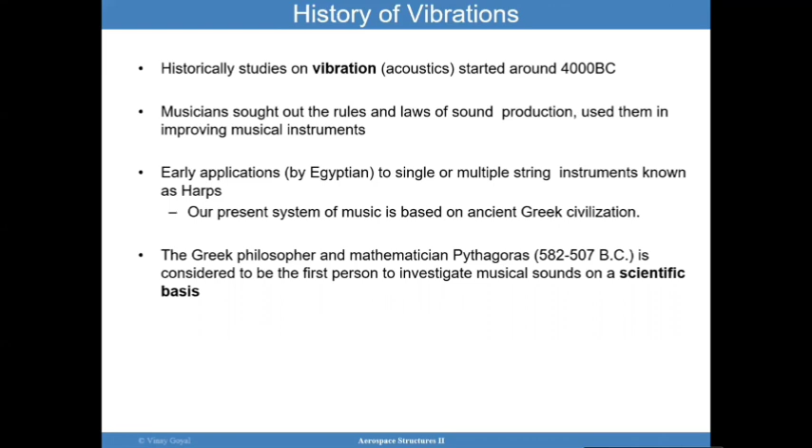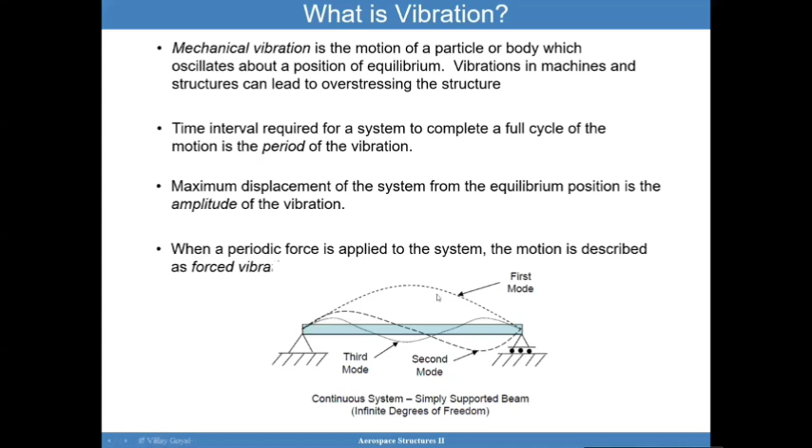We call that a forced vibration problem because it's no longer free. What I mean with free is I pluck it, I let it go, and the system starts vibrating in one of these shapes. That's a free vibration situation. In forced vibration, I continuously apply that load, forcing the system to react with that given force. Very important definitions to think about as we move forward.

Why dynamics? Why do we need to look at dynamics? Any structure or system undergoing dynamic loading will respond differently than a system undergoing static loading. If I apply a load very slowly, there's potential it will react statically. But if I apply a sudden load, it's more likely to respond dynamically. That's not always the case, and we'll talk about that later.

Dynamics also helps us quantify the dynamic characteristics of the structure, and it can allow us to predict the response of structures under a dynamic environment. Excessive vibration can also cause excessive deformation. Take as an example car noise, vibration coming from the engine, so you could have a situation with significant excessive deformation.

Turbo machinery, as an example, excessive vibration can cause structural failure due to high dynamic stresses. Examples include turbine blades and buildings under earthquake motion.

If you were to do the laundry and put all your clothing on one side instead of distributing it around a circle, and you run a spin cycle, you're going to see a tremendous amount of noise, and the machine will start vibrating. That's an example of what could happen if you have an imbalance.

Such imbalances can also occur in turbine blades or rotor dynamics. You could have a blade that's not of equal mass as the others, and this will cause excessive vibrations on that particular turbo machinery. So why dynamics? Because dynamics can drive failure, and we need to really understand it.

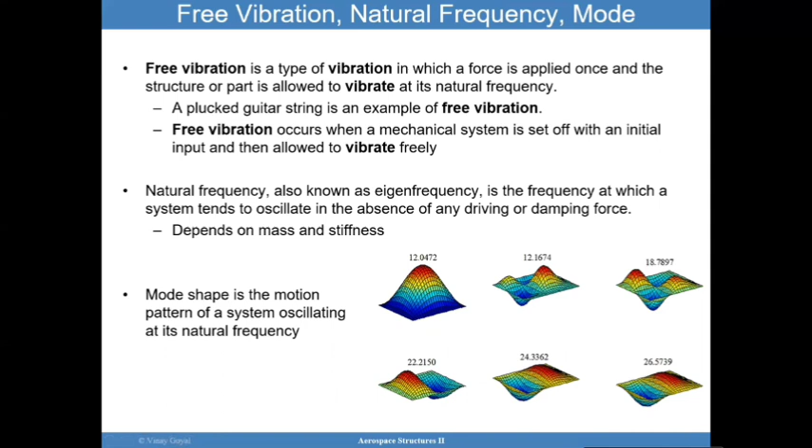These frequencies are in hertz, corresponding to the number of cycles vibrating per second. So it's clear that this is an important consideration for whether you should consider a structure static, quasi-static, or dynamic.

Natural frequencies close to the driving frequencies can cause excitation. If I have a natural frequency of a plate at 20 hertz, say, and apply a loading close to 20 hertz, back and forth at that same frequency, I'm going to cause something called a resonance condition, and that resonance condition can cause failure. So it's important to understand that if operating frequencies are close to the natural frequencies, it could cause failure.

But if I'm operating way outside of the natural frequencies, it's possible to treat the system as quasi-static or static, which means the load is applied slowly.

There are other types of analyses that should be considered: harmonic loading, which we'll be talking about, random vibration, also to be discussed, as well as acoustics, shock, and vibration responses.

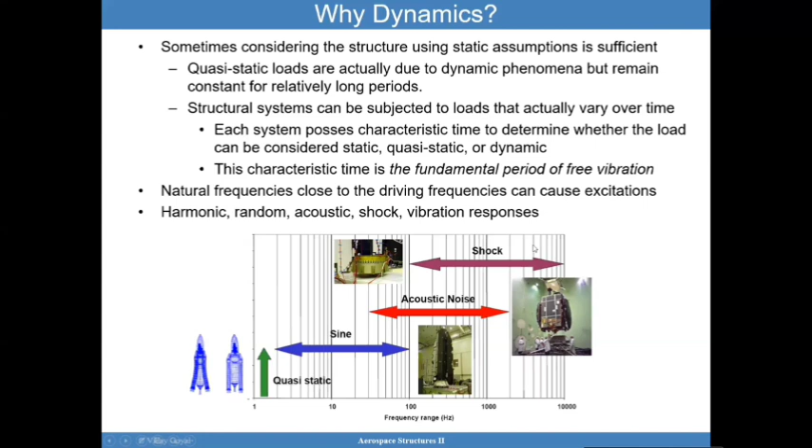What are the different types of dynamic analyses that could be conducted? You have the real eigenvalue analysis. This is basically a free vibrations problem, meaning I have that plate that I showed you earlier, and that plate is plucked. So what are those natural frequencies and mode shapes that plate is going to take?

You also have the linear frequency response analyses, where there's a steady state response associated with loads that vary as a function of frequency. We also have the linear transient response analysis via direct time integration, so you're looking at the response of linear structures to loads that vary as a function of time.

You have the modal dynamic transient analysis, where you look at the response of linear structures to loads that vary also as a function of time. You may use this approach to look at jitter analysis, base drive analysis, and coupled loads analysis, things that we'll be talking about later on.

You also have a shock response analysis that can be performed, and then you have the vibroacoustic or random vibration analysis that can be conducted.

So today's course, we're going to be discussing the real eigenvalue analysis, the transient response analysis via direct time integration, and I'm going to jump into modal transient dynamic analysis. Then we'll also be covering steady state response due to an input that is of a harmonic nature. I'll be discussing what harmonic really means.

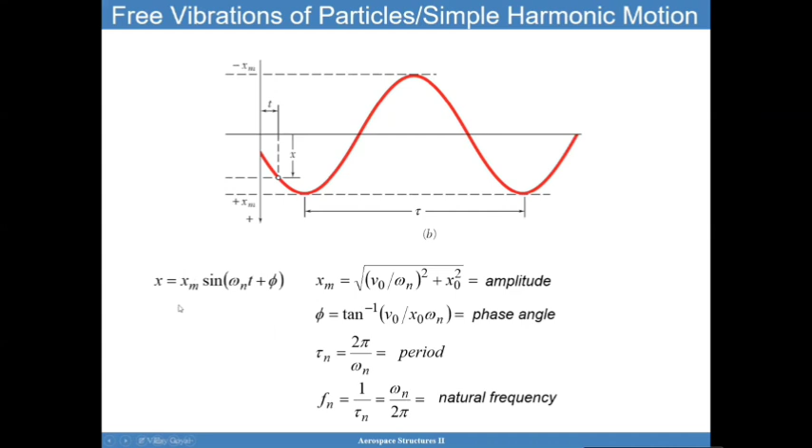So once you know the position x, you can calculate the velocity as x dot, because velocity is equal to the derivative of the position with respect to time. And you can also calculate the acceleration, which is the second derivative of x with respect to time. This is exactly how you find the velocity and acceleration.

So let's cover a little bit about forced vibrations. Okay, let's discuss that now.

In the previous example, we didn't have any forcing input that was dynamic. We only had a weight applied, coming from the box itself, and it was getting balanced by the tension in the spring. But we did not apply a force that was vibrating.

In this case, what I want to do is apply a harmonic force, a periodic force. What I mean by applying a force is that the force is oscillatory. Think of it as you pushing and pulling continuously, following a sine function. Omega f is the frequency at which I'm applying that force back and forth, okay?

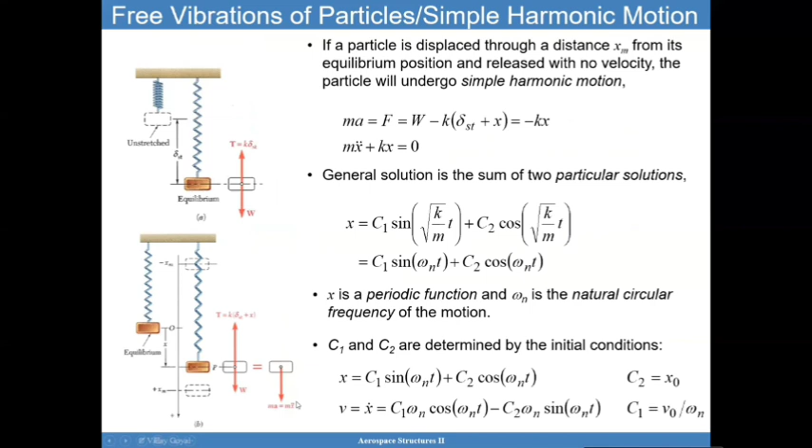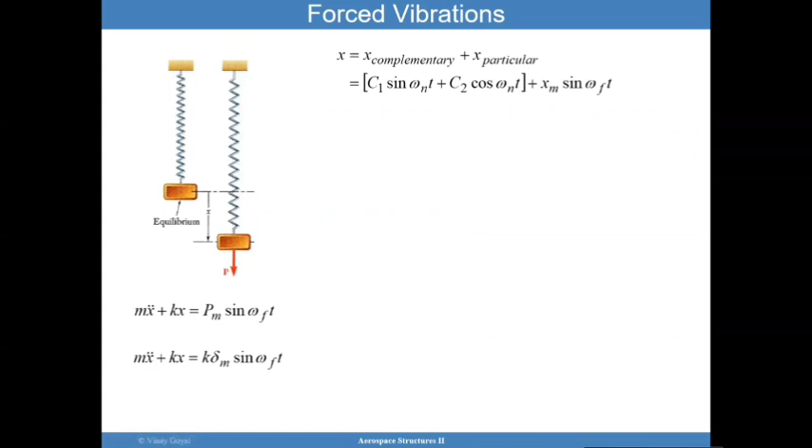So how do we solve this equation here? It's a very simple way of approaching this. First, you have to consider the complementary solution plus the particular solution. The complementary solution is fairly simple, it's the solution we discussed before. Then you have the particular solution with xm, which can be found by substituting this expression back into the differential equation. Again, I don't want to use this course to teach you how to solve this, as you have taken a differential equations class.

But we can take the particular solution and substitute this into the governing equation, and when you do that, you can basically solve for xm. Once you solve for xm, you'll realize that K and M are known, because that's the stiffness and the mass of the box, and omega F is the frequency you're applying. So this right-hand side is fully known, so you can find xm from this equation. Then C1 and C2 again fall from the initial conditions we talked about before.

Notice how when omega F is close to omega N, this bottom denominator goes to 0, and so the amplitude, or xm, from the particular solution side, goes to infinity. Clearly, when omega f equals omega n, you have a resonant condition, meaning that the forcing frequency being near the natural frequency of the system causes a significant amount of motion, or amplitude, in this example. You can see here that we take the peak amplitude of the motion, and it goes to infinity. So we have resonant conditions at that point, and we call that resonance of the system.

But the good news is that in a lot of situations, the vibrations are tempered by the fact that we do have natural damping. You can have dry friction, for example, or a situation of fluid friction or internal friction. I guarantee if you take a little spring with a mass and you yank it and let it go, it'll start vibrating, but it's going to die out. Why is it dying out? It could be heat dissipation, the spring itself has damping within the material, or it could be the air surrounding it with drag causing it to slow down. So there are a lot of different ways this could happen.

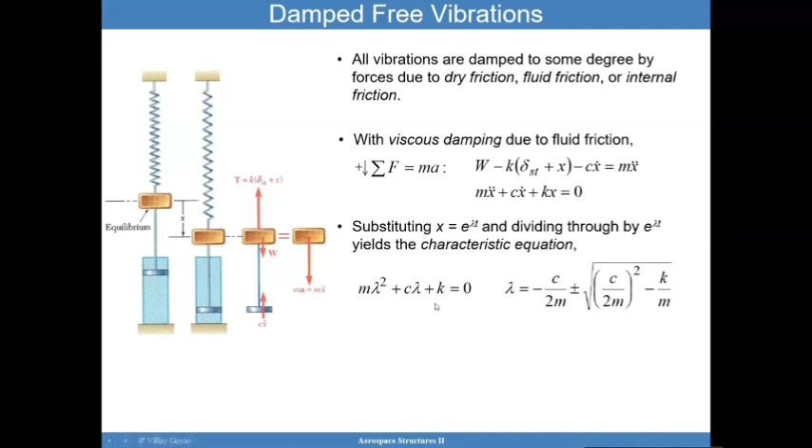You can use differential equation solutions to solve it. wolframalpha.com also works—if we substitute e to the lambda t into this equation, we can find the solutions for this problem. I'll just jump to the punchline: these are the solutions you can find.

You have the situation where if I define c sub c as twice m times omega n, and call this the critical damping coefficient—this mass, this natural frequency multiplied together—if this coefficient c is greater than the critical damping coefficient, then you're going to have heavy damping.

So the motion will have very little oscillatory behavior, almost non-vibratory—I invite you to think about how that could happen. If I have critical damping so that C equals C sub C, then you get non-vibratory motion again, so you don't have this box moving back and forth. All it's going to do is die out. Most likely it will follow something like this dash line and die out.

The light damping situation is where this coefficient C is less than the critical damping coefficient. In that case, you get vibratory motion, and it's going to die out eventually. I wanted to point out that in a lot of situations, the motion may die out after this initial velocity or initial force you apply. Eventually, the motion will die out.

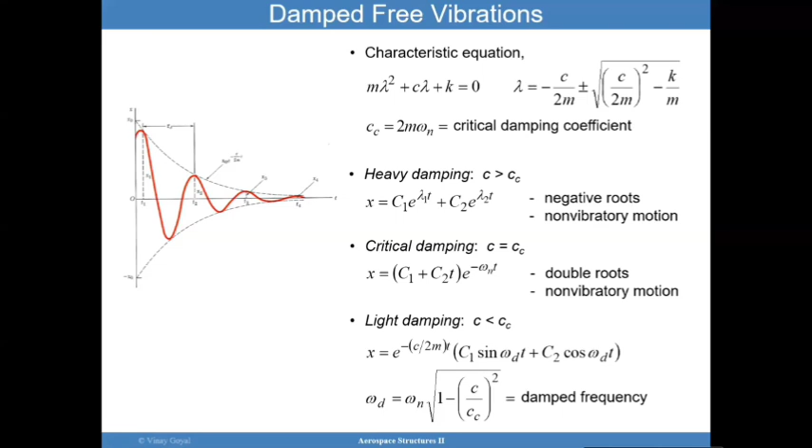Another situation is a forced damped vibration situation, where I have the same equation as before—not applying any external force, just getting it going back and forth. But if I add an external force now that is of a harmonic nature, we could consider that as F naught cosine omega t. F naught is the amplitude of the forcing function I'm applying. Omega is the frequency of the forcing function I'm applying.

The solution is made up of a homogeneous portion plus a particular solution. The homogeneous part of the equation is this one here, and the particular solution to this equation is this one on the right, where x and phi need to be found. That can be found simply by substituting this into the top equation.

What I want you to notice is that as time grows, as t becomes large, e to the minus whatever is here becomes closer and closer to zero, so these terms will disappear, and you get a steady state motion driven mostly by this term right here. So an input that's of harmonic nature as a forced vibration input is going to cause, if you have a damped vibration situation, an initial transient part of the solution, plus a part that will not die out, and that's harmonic—this is the steady state portion.

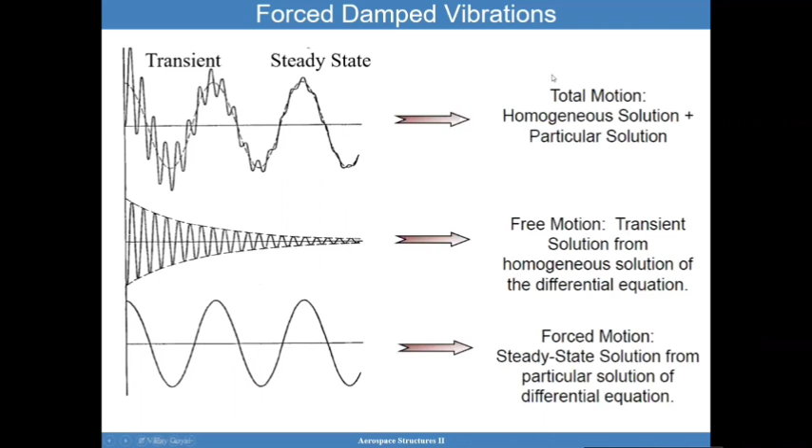Another interesting aspect of this problem is to really understand how much amplification I'm really getting with respect to the static solution. As you know, I could apply load P on this box statically, and that's going to cause an amount of stretch and an amount of motion.

But if I'm interested in understanding how this harmonic motion amplifies how much this box really moves, we can determine that, because X here is equal to this, and I can try to determine the amplification by dividing X by how much deflection I would really have gotten if I apply that force statically.

So if I apply that force statically, this is X naught, and I can determine if I were to apply the motion—the force, but now in a harmonic way—what is the amplitude of how much more it amplified.

The second observation is, assume for a second that we didn't have this coefficient C. That returns to a situation where you have no damping.

So you recover back the situation where if omega is close to omega n—the forcing frequency is close to the natural frequency of the system—then you have an infinite amount of magnification. But we know for a fact we usually have some amount of damping, so it will not be infinite, and this is where this term comes into play.

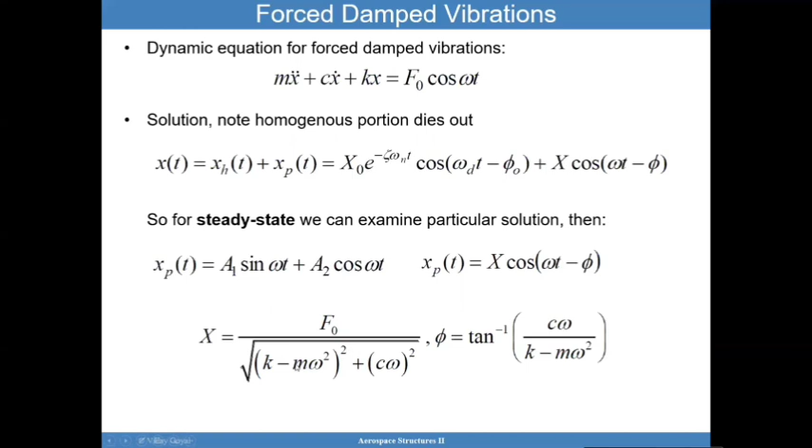Now, I'm not trying to add more variables and confuse you, so pause the video and see that what I've done is nothing more than manipulating this equation. I divided the bottom by omega n squared, since omega n squared equals k over m, and used this to rearrange the equation, relating it to what happens if I apply that load statically.

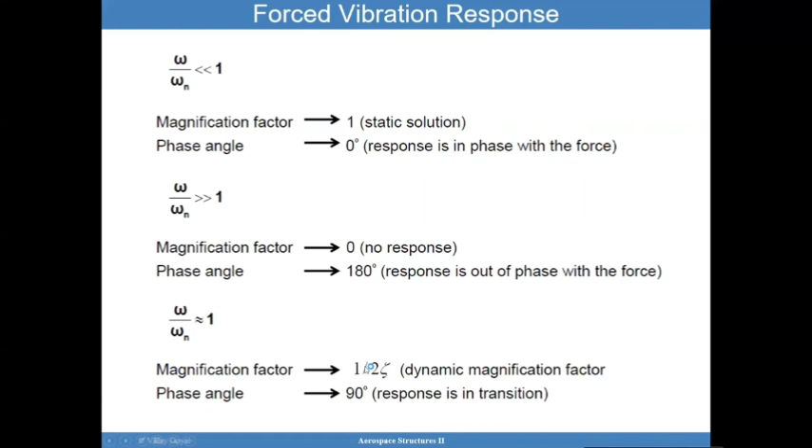Very important: if omega is much greater than omega n, you almost have no response in the system, and the phase angle will be such that the response is out of phase with the force. If omega is close to omega n, which is the resonance condition, the magnification factor is given by 1 divided by 2 times this symbol, which is the ratio of C, the damping coefficient, divided by the critical damping, defined earlier in the charts.

So how do you deal with a situation where you have a general periodic force? It could be a force that varies as a function of time but repeats itself. I don't want to go into heavy math, but I want to bring this to your attention in case you encounter it. The type of force I showed you was a simple harmonic sine function, but you could have a very general periodic force.

The Fourier series states that a periodic function can be represented as a series of sines and cosines. You can take any periodic function and express it this way, written in summation symbol, where AJ and BJ can be found through these formulas. This is how you express a general periodic function using Fourier series.

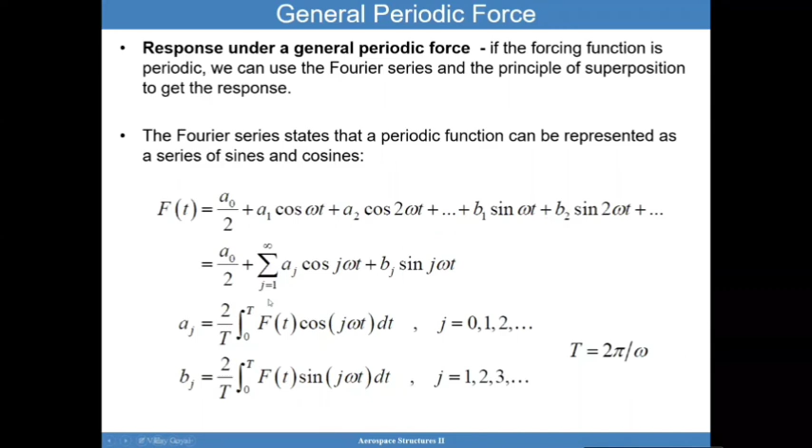So let's jump into finite elements, because I think that's where we can really take the idea of dynamics and really see it being applied at full-blown proportions. So that's where we want to jump into now.

What is the goal is that if you have a structure that's subject to loading environments, and it could be static, it could be dynamic, I want to be able to tell you where the structure could fail. That's one potential use of this. Another potential use of this is clearances. I want to keep a particular clearance.

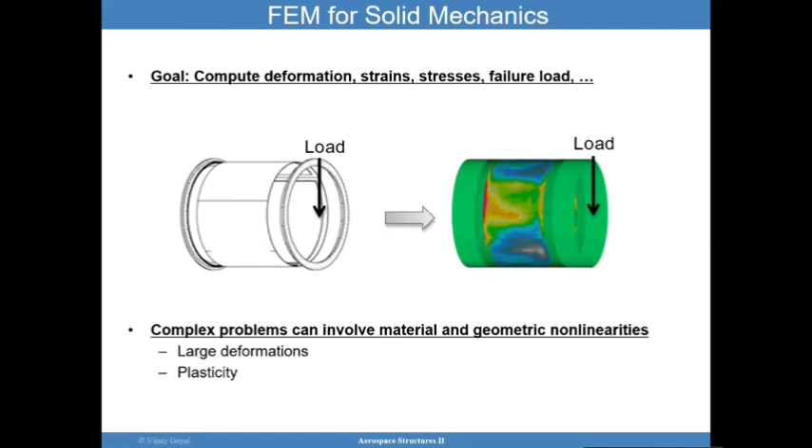So to solve this kind of problem, I cannot just simply use these simple formulas because the systems are a lot more complex. And so what are the driving equations that tell us about the motion of these systems?

So you have the equilibrium equations of elasticity, which were previously discussed. And this one comes from the second Newton's law, the integral form of second Newton's law. This is basically summation of forces equals ma. Think about it. This acceleration right here is the deflection, and these are body forces. And so stresses, you're taking the derivative of stresses with respect to the position, plus the body forces equals the accelerations. And these are the deflections.

So you have three equations here. I takes values 1, 2, and 3. And you have 6 stresses that are not known. So 3 equations, 6 unknowns.

You have the constitutive law, which relates stress to strain. And I'm using the most general way of describing stress to strain, which is an anisotropic material. Okay, so you're used to stress equals modulus times strain. I'm just trying to point out that the 6 components of stress are related to the 6 components of strain. And this constitutive law can be found through testing. So C is fully known. And in a simple situation, it's just the modulus of elasticity.

So there you have 6 equations because I have 6 components of stress. So I should have 6 equations here. And I have 6 strains are unknown. These are the 6 strains that are unknown.

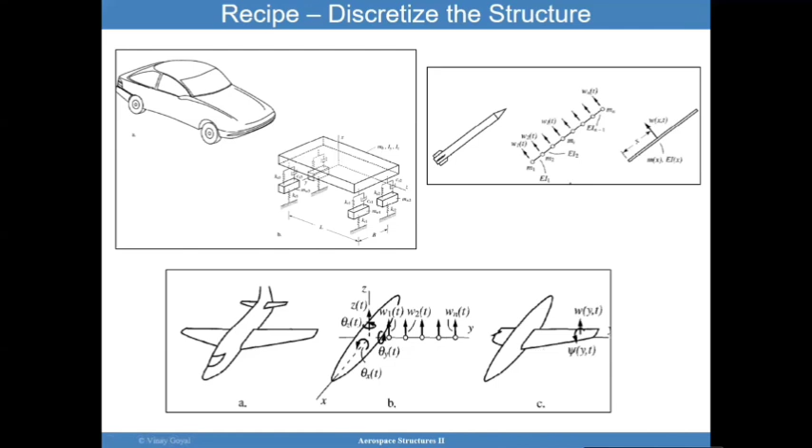So how do I solve these equations, which are highly complex and highly coupled? As you can see here, one way to solve these equations is to plug epsilon ij into this equation. And so everything here now is in terms of deflections. Then you can plug this equation back into the first set of equations. And now you have a mega gigantic 3 equations that are functions of deflections, which you can then solve. And once you know deflections, you can solve for strains. Once you know strains, you can find stress.

And if you can find stress and you know the strength of the material, you can determine whether the structure will fail or not. So the idea in finite elements is to formulate a systematic solution procedure for solving these partial differential equations over simple subdomains.

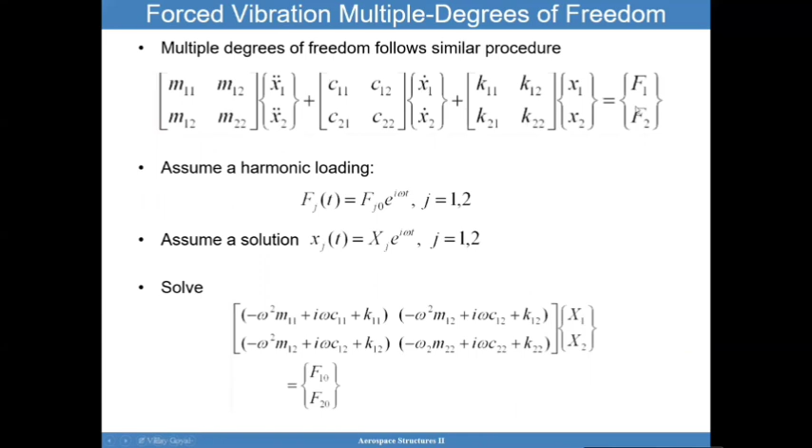And here I have damping, and we can add that too, but the bottom line is this is a mathematical miracle, because I took 15 equations that are highly coupled and turned them into a matrix of mass, stiffness, and a vector of deflections and a vector of accelerations equals a vector of external forces applied. So this is huge progress that we made here.

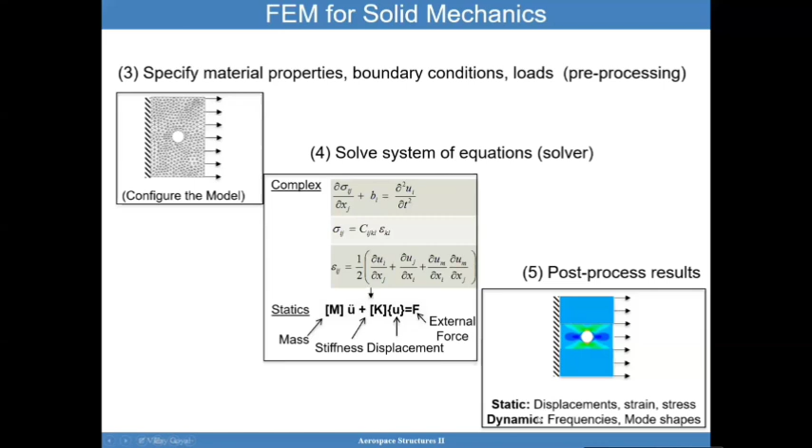Then I can now solve this equation. I'll show you how this is done. Once you solve these equations, you can post-process the results. If I want a static solution, you turn the acceleration term to zero and get the static solution. If I want to solve this dynamically, I can do that too.

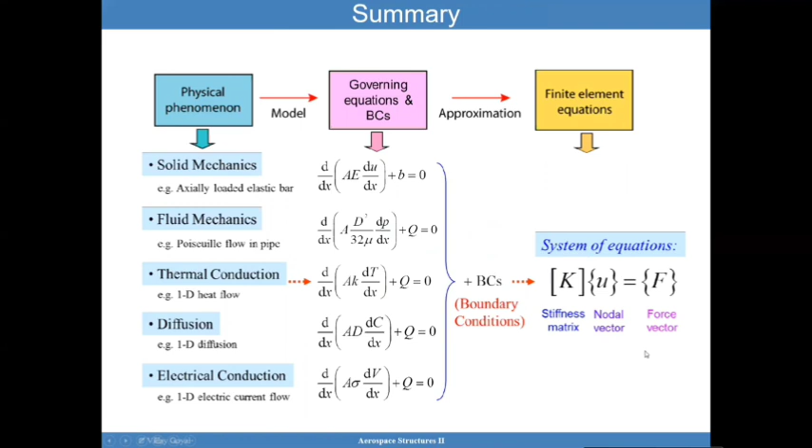You can get a system of equations that looks like here on the right-hand side. Here's an interesting example of a temperature heat transfer problem. I know we're not discussing heat transfer in this particular lecture, and it was discussed earlier, but I want to discuss it in terms of what finite elements is really doing for you.

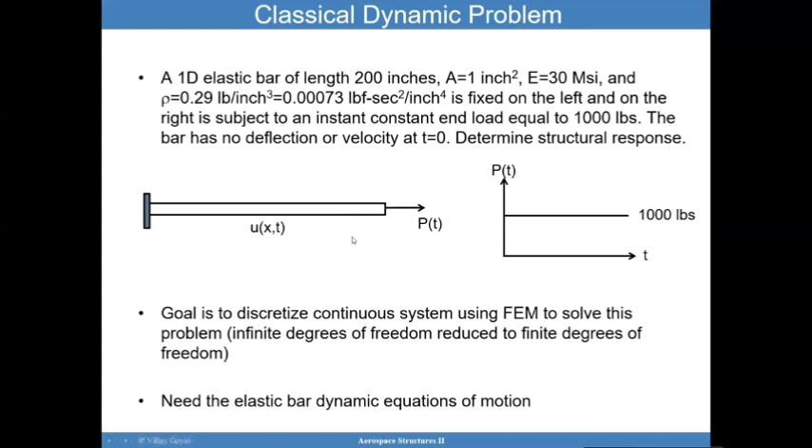So what is the first step? I don't want you to get hung up on the mathematics, but I'm trying to show you that I can take any equation and turn it into discretized form. I will show you the fundamentals of how that's done. That does not mean that this particular lecture is meant to teach you how to do that.

For that, I have other lectures in my YouTube channel that go into that in more detail.

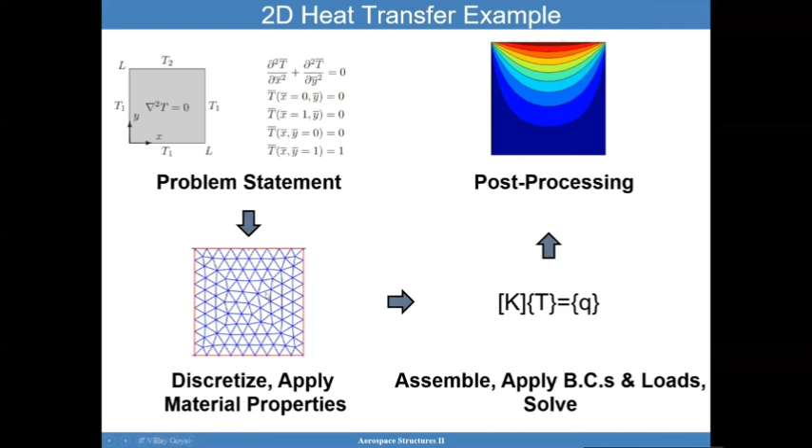So now this is a continuous system, but I want to discretize it into two elements, two domains, two subdomains. Let me remind you what we did: we have a continuous system, we discretize it into a finite number of domains—which is the reason it's called finite elements—because I've taken a continuous domain and turned it into a finite number of subdomains, and each of these subdomains is called an element.

In this case, I've taken a continuous system and turned it into two elements. So I've simplified and discretized the domain into two elements, and I want to approximate the deflection u, the axial deflection across this bar, with a linear approximation across each of these elements.

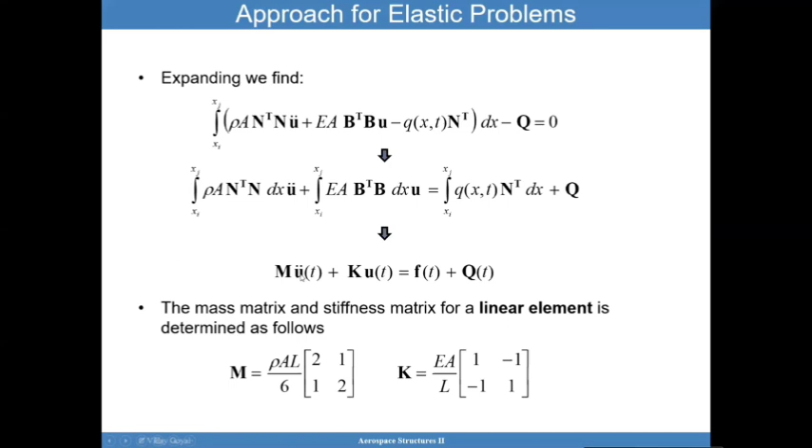That makes sense. I have it for a single element. And the beauty of this, and the point I'm trying to make over and over, is that I have taken a fairly complex differential equation, where u, the deflection, varies spatially but also varies in the time domain. I've shown you how this was turned, for a single element, into a simplified linear algebra type problem.

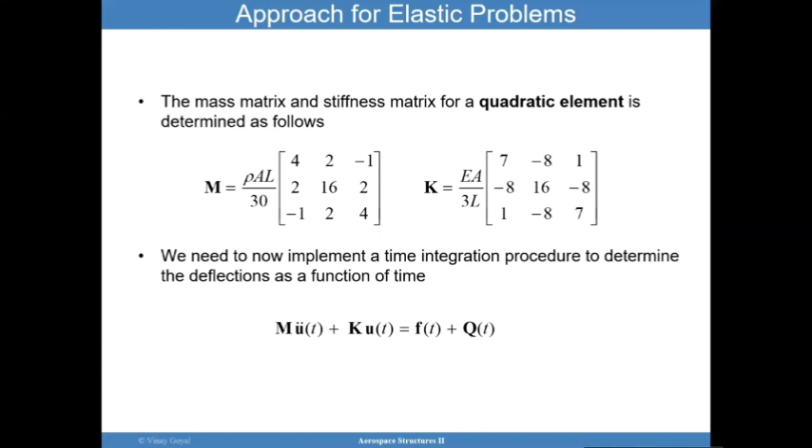For a quadratic element, if I were to use a more advanced element where I approximate the deflections across the element using a quadratic approximation, then you will have a 3 by 3. It will be more accurate. But the bottom line is we need to figure out a way of solving these equations.

So let's go back to this classic dynamic problem. I've shown you how I was able to turn a differential equation into a simplified problem where it looks like a linear algebra problem. So here is a bar with the load applied as a function of time.

And I've discretized the domain into two elements, so I have a total of 3 degrees of freedom. This one right here is known because it's always fixed. So for element number 1, I have this as a mass matrix and this as a stiffness matrix. For element number 2, I have this as a mass matrix and this as a stiffness matrix.

What I want to point out here is that we took a continuous system where U varies across the whole thing, and I've turned that into a discrete system where it only depends on the unknowns at nodes 1, 2, 3. So I have simplified the system quite a bit with 2 elements and 3 nodes, 3 degrees of freedom. This is the important thing I really want you to understand.

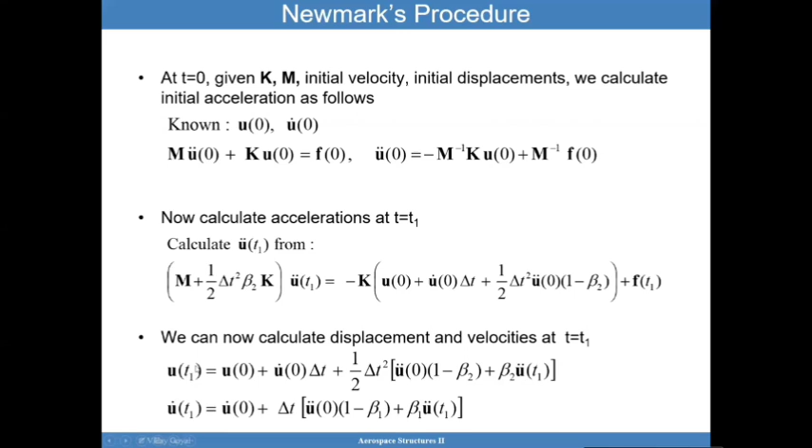Based on this information, I know the velocities at time equals 0, the accelerations at time equals 0, and the accelerations at time equals t1 because I calculated it from here. Beta 1 is a parameter from Newmark's method, and this allows me to calculate u dot at time equals t1. So now I know the deflections and velocities at time equals t1 — good news, I was able to march the solution forward.

So what happens if you want to time step a little further, to time equals t2? Again, we can calculate the acceleration. I'll look at time equals t2. Delta t here is t2 minus t1, so I went from t1 to t2 — your delta t is your time step here, which is t2 minus t1. So this is fully known.

M bold is known, K bold is known, beta 2 is a Newmark method parameter, so all this is known. All this stuff was calculated already — I found the deflections, velocities, and accelerations, and I know the force moving forward at time equals t2, because that's what I'm applying. So all this is known; we found it from the previous time step. From all this information, I can invert this to get u double dot at time equals t2.

Once I know this acceleration at time equals t2, I'm ready to find the velocity as well. I know the velocity previously at time equals t1, and the acceleration at time equals t1. Now I know the acceleration at time equals t2 because I solved it here, and that allows me to find the velocities at time equals t2, the present.

We can now calculate the deflections too. I know the deflections at time equals t1, the velocities at time equals t1, and the time step, which is t2 minus t1. I know the accelerations calculated in the previous time step, and the accelerations from this time step. So I know all this information, and now I know the deflections and velocities at time equals t2. Now we continue to repeat the process and march the solution forward.

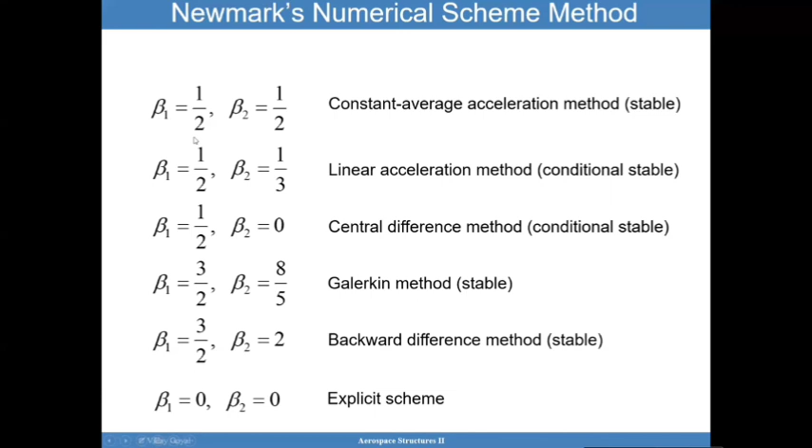In other words, if you keep your time step small, you're pretty much going to converge the solution. You're going to have unconditional stability if beta 2 is greater than beta 1 and beta 1 is greater than 1/2. I won't go into the mathematical theory of this because that's not really what I want to accomplish today. I have a YouTube video that goes into a lot of detail on this.

Going back to the problem at hand, I took a little break because my point was to show you a few things here. Let me step back. I had this highly complex elastic bar partial differential equation where the deflection varies spatially and over time. My goal here is to solve that in a simple, systematic way, because finite elements gives you a systematic way of doing it.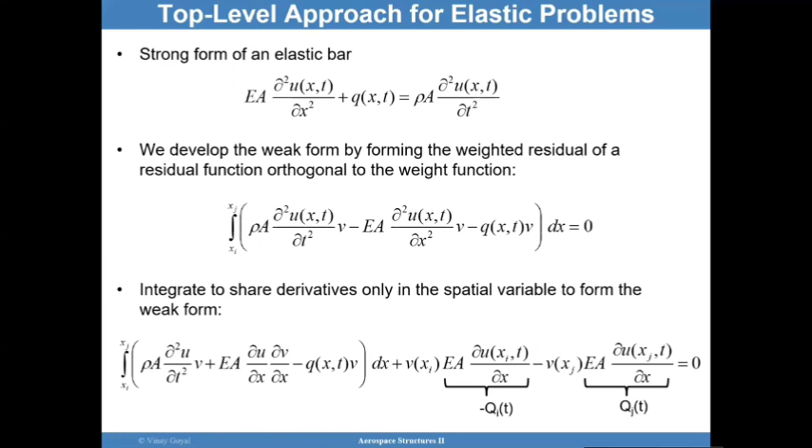What we've done is discretized the deflection, which is a continuous variable, into discrete elements. We discretized this domain into 2 discrete elements, and as a consequence, I've discretized the deflections into 3 nodes. In between, I have an interpolation or approximation function of that deflection. What I've really done is discretize that partial differential equation and turned the problem into a linear algebra problem. What I was trying to show you here is how to solve such an equation numerically.

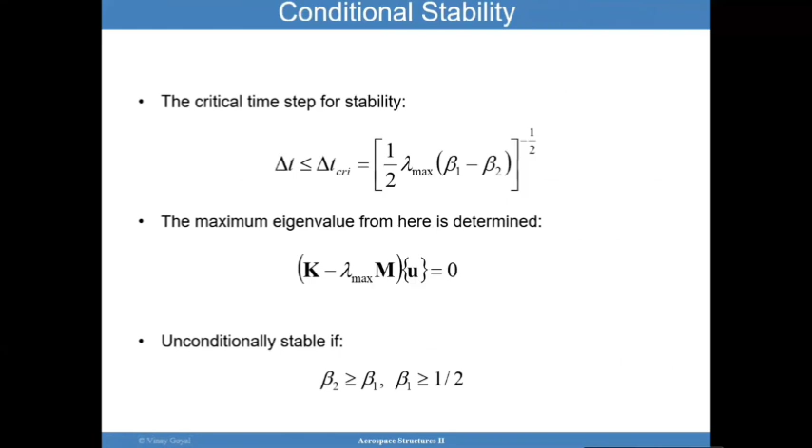And that's what I just did. We're going to demonstrate it now for the elastic bar problem we talked about. So I'm going to go ahead and march the solution for this. But before I do that, I want to impose the boundary conditions.

We know the deflection at u1 is 0 because it's fixed on that end. So since the deflection is 0, the acceleration is also 0. As a consequence, you can then eliminate the first equation—it's not doing much for me because I already know the deflection there. So we can just focus on the bottom two equations.

So I get this equation now, and these are the only two unknowns. We've basically eliminated the first equation because the deflection is known—I don't need it. In fact, I can see here that it doesn't matter; I can look at the second and third equation. Many people get confused about what you're looking at here, but these are three equations. That's what matrix notation is.

If you multiply this row times this column, you get 4 times u2 double dot plus 1 times u3 double dot, and so forth—that's your second equation. You can see here this 1 times 0 is doing nothing, so I can just focus on the last two equations. It eliminates the first column altogether, so I just have this square here that matters with these two vectors. That's what I got.

Now note that I don't have any force—no force has been applied to U2. Let me take you back to the original problem, and sorry for going back and forth. U1 is 0, no force is applied at this node, but we are applying a load at U3, which is an instant force of 1,000 pounds. That's why you see, corresponding to U3, this force applied.

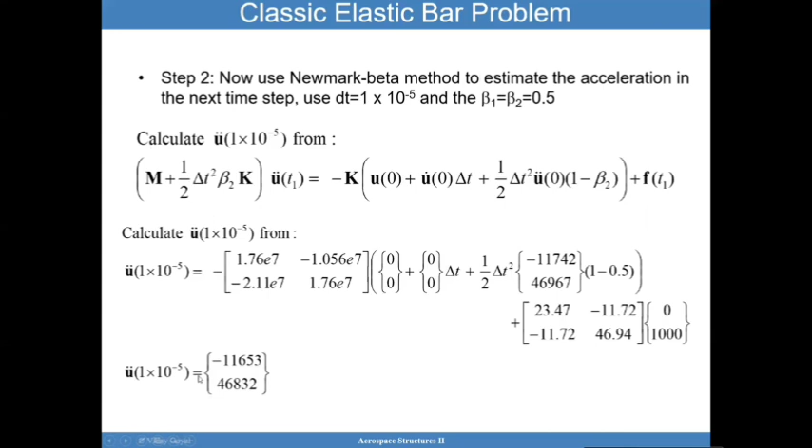Now that I know the accelerations at the previous time step and at time equals 0, I can plug it in here with beta 2 and beta 1 as 1/2. So I know delta t, I know u dot, I know u, and then I can get the deflections at time equals 1 times 10 to the minus 5.

So all this is known. The velocity is also known because I know the velocity at time equals 0, the acceleration at time equals 0, and the acceleration at time equals t1. Once I have all this information, I'm able to calculate everything I needed for time equals 1 times 10 to the minus 5. You can see a lot of computations that need to be done, and this mass matrix calculation has to be inverted — you have to invert this too.

Using this new information, we can calculate accelerations in the very next time step, 2 times 10 to the minus 5. Again, plug in the stuff from the previous time steps, and the force moving forward, so the present now is 2 times 10 to the minus 5. I know that's what that is. Now I can solve for the accelerations by inverting not the mass matrix, but this formula here, which will turn into the mass matrix if beta 2 is 0.

So doing that, I'm able to find accelerations. Once I know the accelerations, I can again find the deflections and velocities at this particular time step, so now repeat the process and keep marching the solution.

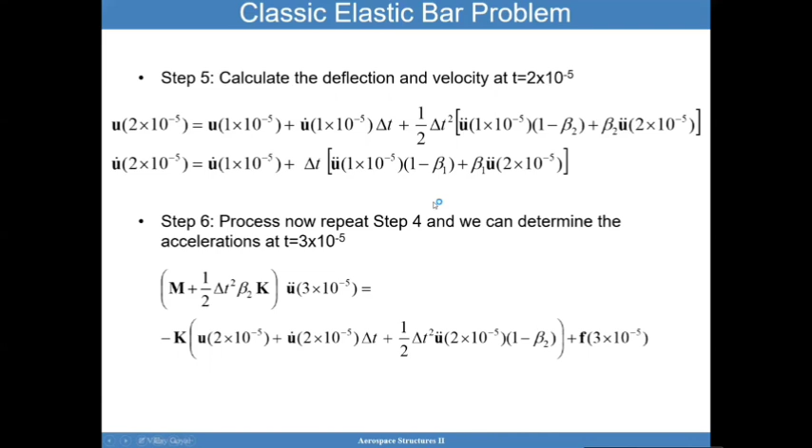This was done in Mathematica. My purpose today is not to teach you Mathematica, but why don't you go ahead and pause the video and see how I went about it. In fact, go ahead and see if you can even program it in a different program like MATLAB and time march the solution. I have a do loop here that basically runs through the Newmark beta method and solves for the deflections, accelerations, and velocities as a function of time.

And here you're going to see that I use all the same parameters in the example problem. I can then plot everything. In this case, the end deflection is what I'm plotting here.

And you can see the solution is periodic. You can see here that this one is repeating, these characteristics are repeating, this is repeating here, and this part is repeating here. So clearly it's a periodic response due to this instant force that's applied and kept constant. And there's no damping, so it's going to continue oscillating forever. Notice that if you apply damping, it's going to die out, potentially.

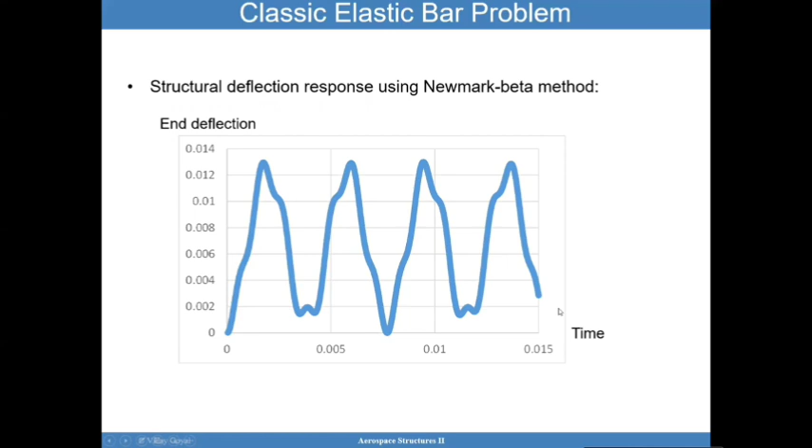How to implement this into Abaqus if you were to do it by hand?

This is not a finite element class, but it's worth explaining the brain behind the process. Here's how you define the nodes, here's where you define the elements, and here's where you apply the material properties. In this case, we have a truss element, and this is the element that was selected.

We have two elements labeled 1 and 2, which have nodes that connect. Element number 1 connects nodes 1 and 2. Element number 2 connects nodes 2 and 3. The coordinates of nodes 1, 2, and 3 are given here, along with the modulus, the Poisson ratio, and the density.

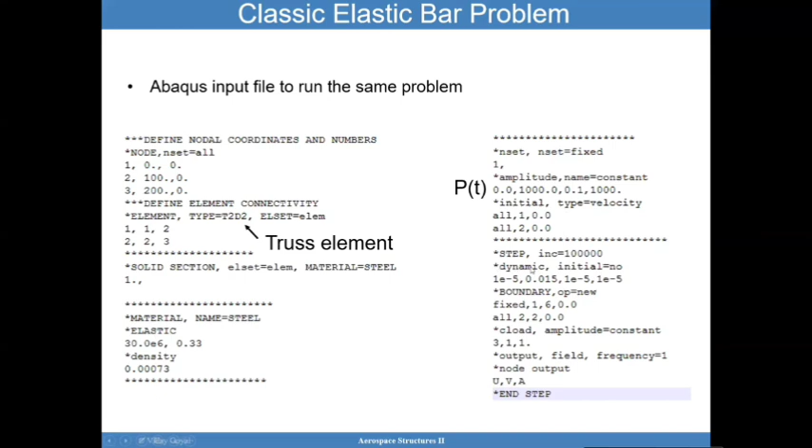I want to explain why that is, but first I want to point out that Abaqus uses the Hilbert-Hughes-Taylor method, HHT, for numerical integration. The Newmark beta method is a special case of HHT. HHT is a method that improves the numerical dissipation for high frequencies without degrading the accuracy of the solution, so you can time march without losing much accuracy. That's why HHT can be very useful.

The main difference with the Newmark beta method is this: Newmark is a special case of HHT obtained by setting alpha equals 0. So if everything I've done uses the Newmark method, setting alpha equals 0 in HHT recovers Newmark. But the reason it was not matching is not because I didn't use the Hilbert-Hughes method — it actually has to do with something called mass lumping.

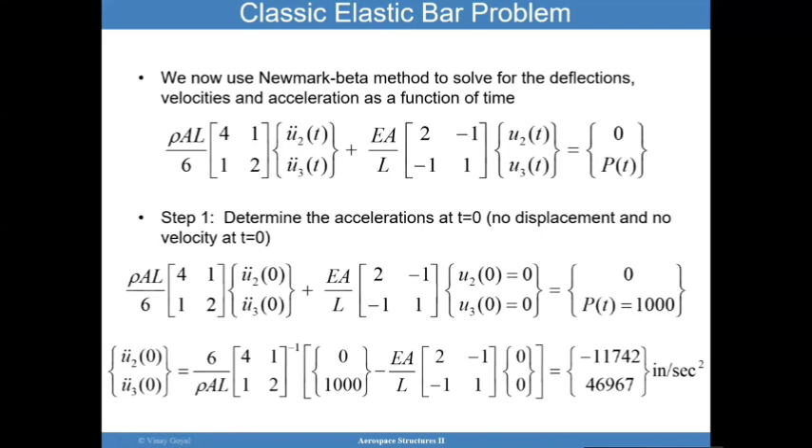Abaqus, to make everything more computationally efficient, looked at lumping the masses. Let me explain what that is. If I look at the mass matrix, it took the off-diagonal terms and put them all into the diagonal: 2 plus 1 is 3, 1 plus 4 plus 1 is 6, you put it in the diagonal, and 1 plus 2 is 3, you put it in the diagonal.

So the mass matrix was actually diagonalized, which improves efficiency in the calculations in some ways, but it reduces the accuracy a little bit.

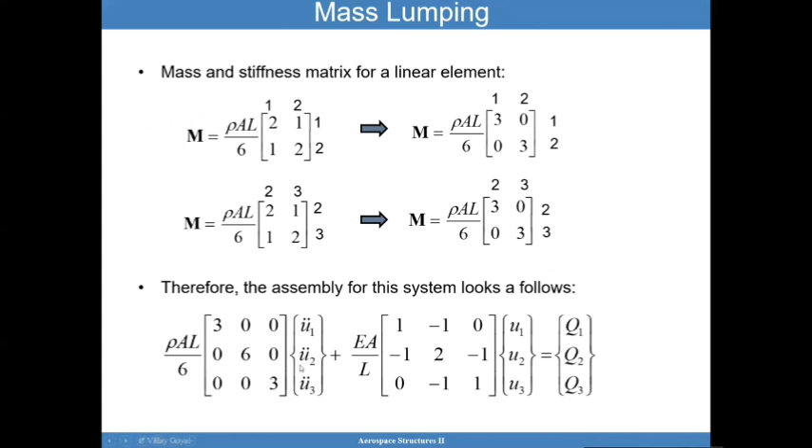So the new system, if we do what Abaqus did and lump the masses into the diagonals, lets us solve for the nodal deflections using the Newmark beta procedure. If I do that, you'll see that even though I used the Newmark beta method as opposed to HHT, I was able to match the solution in Abaqus.

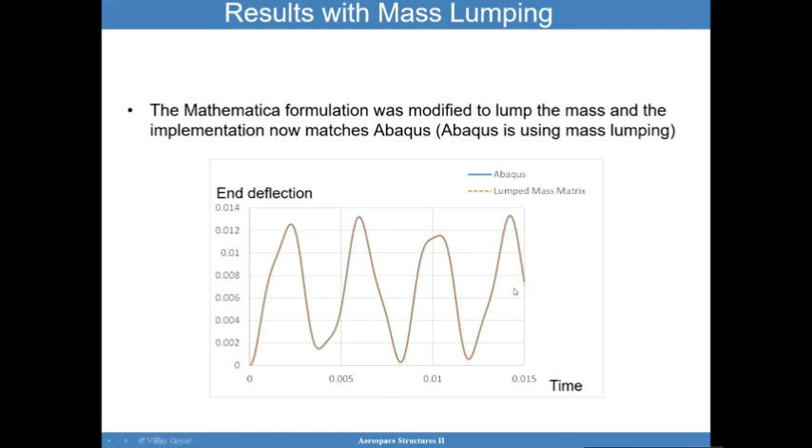We can also look at the problem of a beam. I don't want to bore you with the details of discretizing the beam problem, but in this case the beam can deflect transversely. Before we looked at the axial motion of a bar; now we're looking at how this beam can deflect out of plane, or in a transverse direction, due to loading applied transversely to the bar.

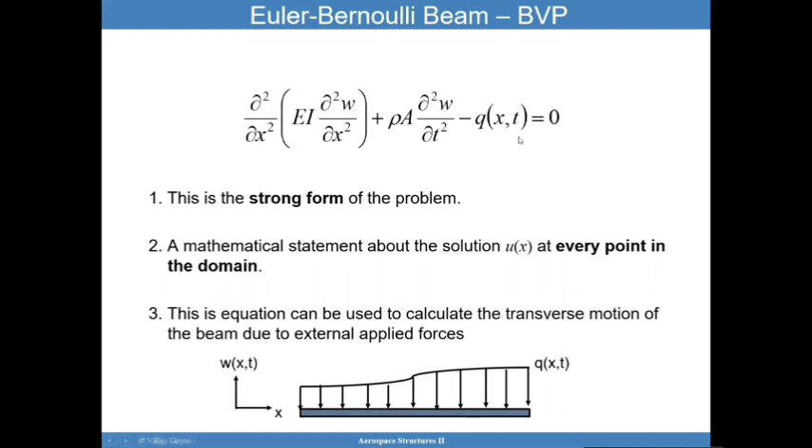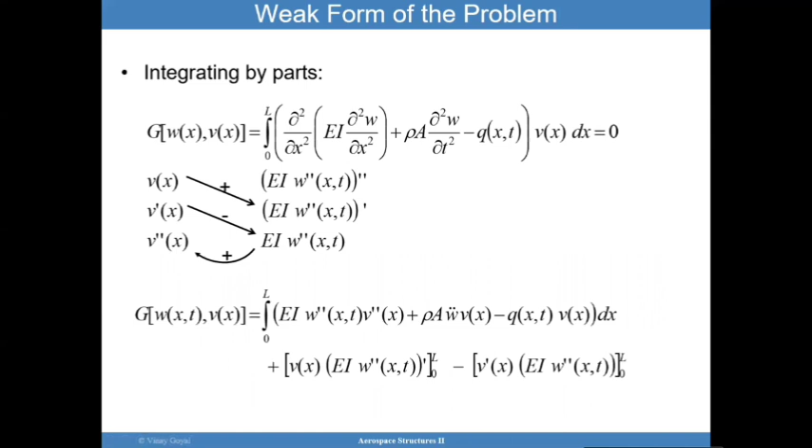Again, very similarly, we can discretize this equation using the weak form Galerkin approach, as we discussed earlier, but I don't want to go through that level of detail. The bottom line is that when you discretize it, you get the stiffness matrix and the mass matrix that correspond to the system we just discretized.

So the bottom line is that by discretizing the stiffness matrix and mass matrix, I'm able to simplify the problem once again. I'm able to get the mass matrix and stiffness matrix in a very similar way I did it for the axial bar problem. So it's very important to see how we've converted a very complex problem into a linear algebra problem, turning that complex equation into md double dot plus kd equals q. I've accomplished a lot by simplifying it, and now I'm ready to study a new problem.

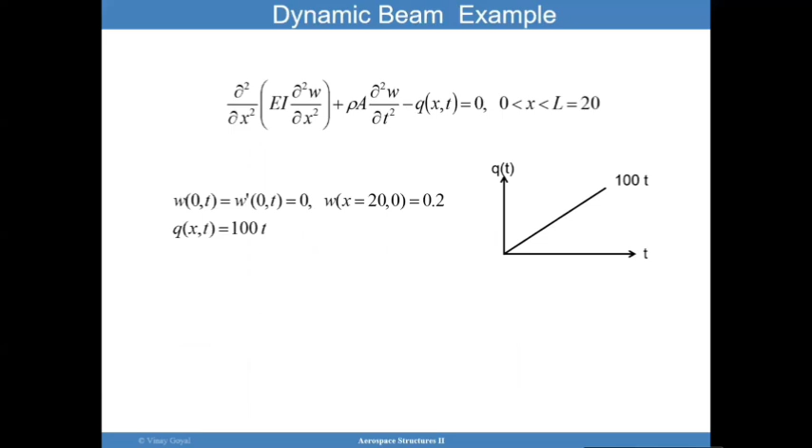This problem could be, hey, just use one element to solve it. Consider a clamped beam, meaning the beam on the left-hand side is not allowed to have any slope and is not allowed to move. This is the governing equation for the problem, and we're going to apply a distributed load on the whole beam. We're applying a loading of 100T, so it's increasing over time and is linear, applied at that rate.

Another thing to point out is that at time equals 0, the deflection at the very end of the bar is set as 0.2. So we're applying a small amount of deflection at the very end of the bar at the very beginning, time equals 0. Also, at x equals 0, which is where the clamped condition is, the deflection and slope are 0, and that's true at any point in time. We're going to use a one-element solution to figure out what is going on with the system, assuming the beam has 0 initial velocity and acceleration.

So very simply, I have this dynamic beam problem. The mass matrix, V here corresponds to the deflections at node 1 and 2, and these are the slopes at node 1 and 2. Remember, this problem is a single element. Node 1 corresponds to the clamped end, and node 2 corresponds to the other end.

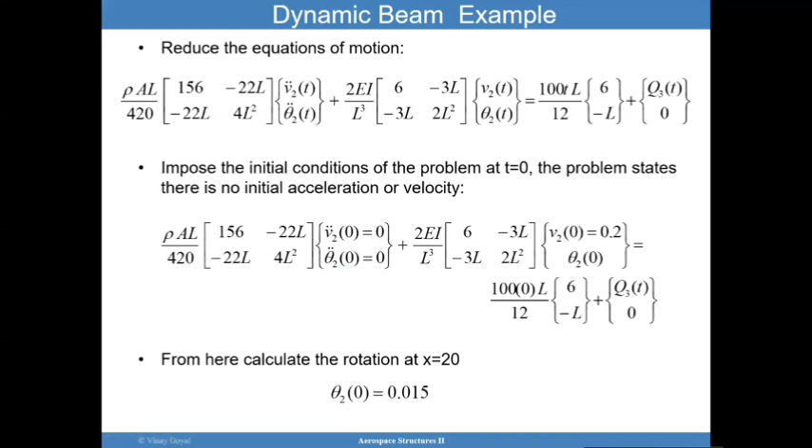So now I'm ready to use the Newmark beta method, using the same procedure. I know time ti, I know exactly all these numbers, and I know the forcing function as a function of time. I can then find the new accelerations. Once I know the accelerations, I can plug it in here and solve for the deflections. Once I know accelerations, I can also find the velocities, and then repeat it over and over.

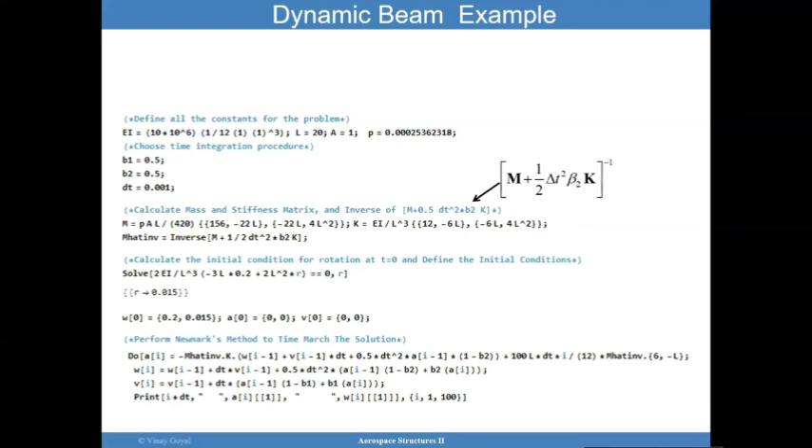You can see here how I've done this in Mathematica. Feel free to pause the video to see how this was done, but it's basically the same procedure I discussed before with the axial bar. To implement this is very simple. This was done in Abaqus again.

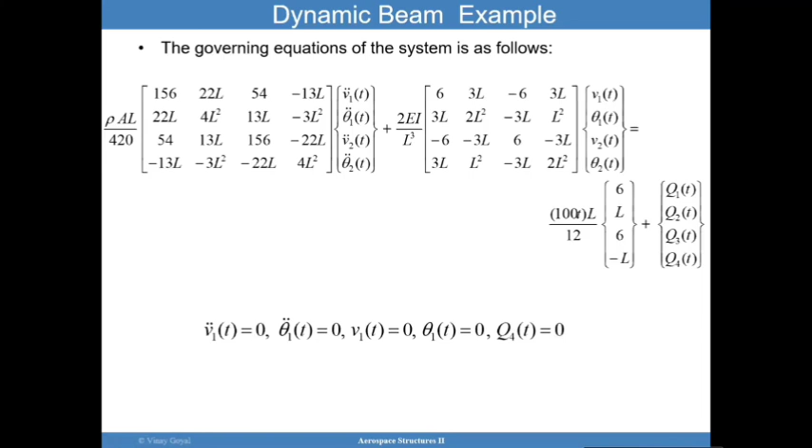As you've seen so far, the calculations can be fairly expensive. I want you to notice something very interesting. Take a whole rocket, and say that I have an equation like this, and this equation has to be solved for the whole rocket, and perhaps the rocket has millions of degrees of freedom. Assume I have millions of elements to represent the whole rocket. This was a simple problem in this case - I was looking at a beam, single element, right?

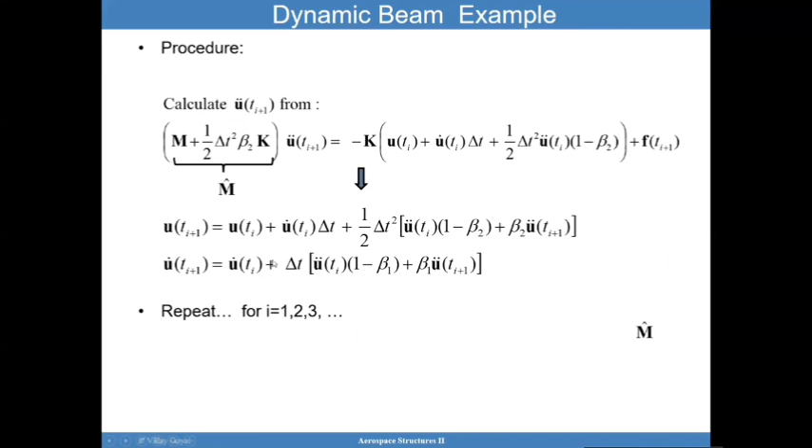But assume now that I'm looking at a very complex system, like a rocket, and I want to solve this PDE, this partial differential equation, over time and spatially for a whole rocket. You can see how this problem can become very computationally expensive. I may have a mass matrix here that could be millions of degrees of freedom. I have a stiffness matrix here that's millions of degrees of freedom. It's going to be a square matrix of millions of columns and rows. And I have to invert this every time step, and that's going to be very expensive computationally to really do.

So it's not practical, and that's why I want to turn into the modal analysis. We discussed already the modal analysis - this is a free vibration problem, the eigenvalue problem, and it's used to determine the natural frequencies and mode shapes. We talked about that, and so what we really want to do is use these mode shapes. If I know the fundamental modes of vibration of a system and I can use that, can I be successful at simplifying the problem just a little bit more?

So that's why I want to really discuss mode shapes right now, because I want to first build the foundation for solving these kinds of problems, which we call direct time integration, and which is very expensive computationally. I'm trying to find other ways to solve this problem, and so I want to look at the basics here.

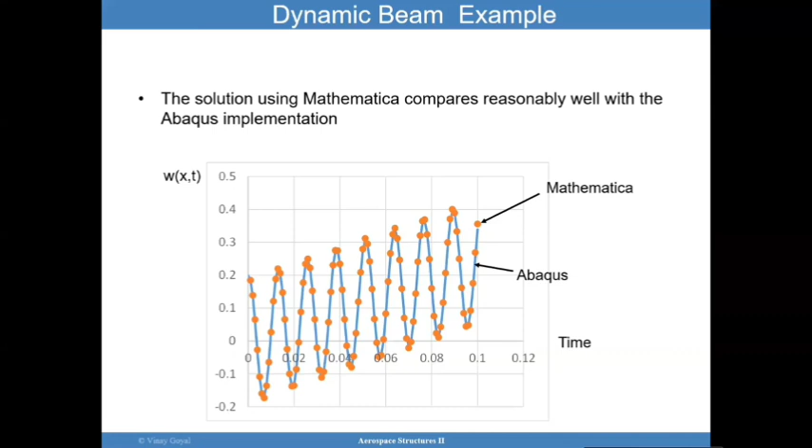So we're going to look at the modal analysis. It allows me to get natural frequencies, and it gives me the mode shapes. I already discussed what a mode shape is - it's the shape the structure is going to take when it's vibrating at that particular frequency. The natural frequency is really how many cycles per second that structure is vibrating if it were to vibrate in that motion.

And so my end goal is to use this idea to solve transient problems, and I'll demonstrate this a little bit later. The motivation for free vibration problems, however, can be used for many other things. You can verify stiffness requirements. You can validate finite element models.

I'll discuss that later in a future lecture. You can assess the dynamic interaction too. You can look at the changes that occurred to the system due to a design change, so you can evaluate design changes due to that. You can actually even use it as structural health monitoring - say that there's cracking in the system, well, the stiffness has been degraded because there's cracking. That's going to shift this DNA that we talked about, and those frequencies will be shifted because...

the stiffness changed, and the frequencies depend on stiffness, so you know that cracking or something happened to the system. We can use it in a transient response analysis, which is my end goal in this particular lecture. Also we can use it, and I discussed this earlier, to ensure that the frequency of the structure does not operate near resonance when a forcing function is present. I invite you to look at the Tacoma Bridge failure as an example. And then I talked about damage detection. So getting natural frequencies and mode shapes, doing that process, is called a modal frequency extraction procedure - that's really what we're trying to extract, the mode shapes and natural frequencies for a particular system.

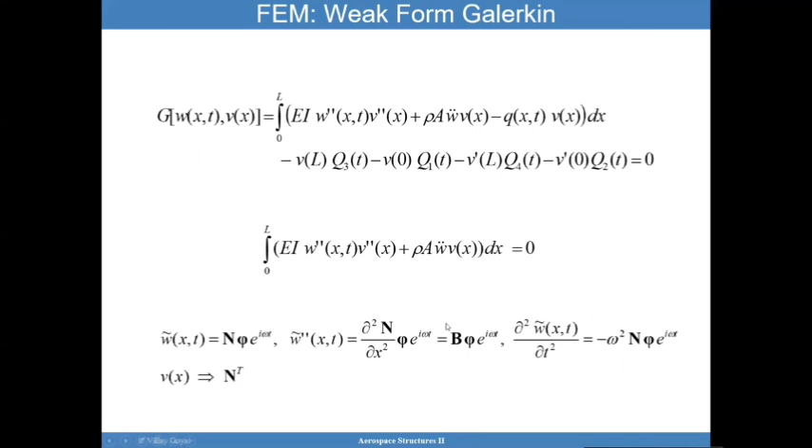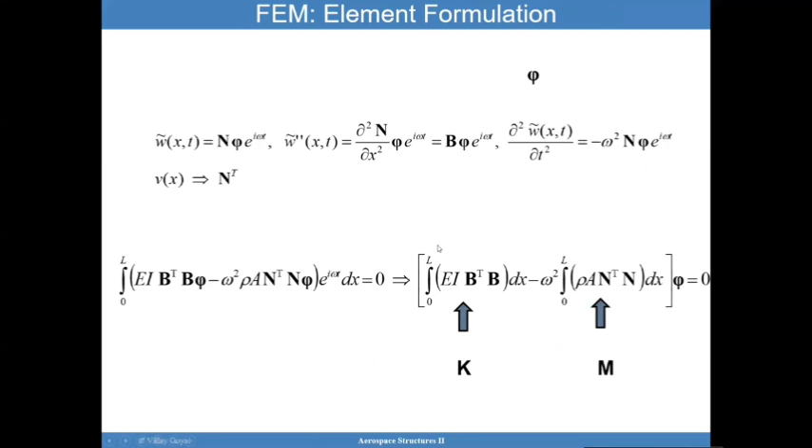I already went through that, but this time, for the time domain, I'm going to plug in phi e to the I omega t. I don't want to bore you with the mathematical aspects, but my point is that you can take this equation and discretize it so it has the idea of a mass matrix and a stiffness matrix.

I've discretized it: if I take the domain of a clamped beam and turn it into a single element, I get a mass matrix and a stiffness matrix. I can plug in the boundary conditions. In this case, the deflection at node 1 is 0, slope at node 1 is 0. You can then show that the system reduces to these equations because V1 and theta 1 are 0, simplifying it further.

The determinant of all this will give you the characteristic equation we're looking for, so we can solve for omega. Pause the video and go through that yourself, but you'll find that omega turns into a frequency of 81 hertz and a second frequency of 794 hertz. Very simple process there.

The point I want to make is that we have a discrete number of frequencies. Because I have a single element, I can only calculate 2 frequencies, not an infinite number. So I only have 2 mode shapes I can plot. 2 frequencies correspond to 2 mode shapes. There's nothing more I can show because I've discretized a continuous system that could have an infinite number of eigenvalues and mode shapes.

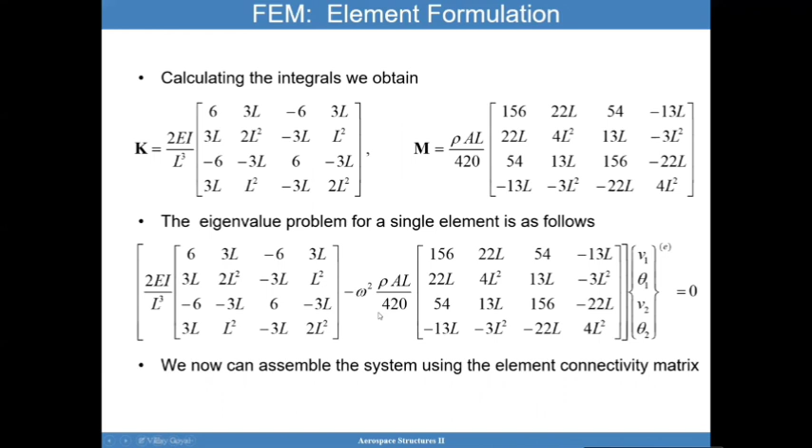I don't want to go into the details on how the discretization works, because that's what a finite elements course is about. I'm just giving you a top level view of what's going on. I've discretized it this way, and there's nothing more I can do. There are only 2 frequencies I can calculate because I've discretized the system.

Notice how if V2 and theta 2 is 0, I get the trivial solution, meaning the beam is hardly moving at all, no movement. Now that we know the eigenfrequency, we can determine the mode shapes. For each frequency calculation, you can calculate the mode shapes that make this happen, finding the eigenvectors or mode shapes corresponding to each of these frequencies, omega squared.

You can now plot it. For the 81 hertz, the beam is going to bend this way. For the 794 hertz, it's going to bend that way, meaning if you were to pluck the beam, it's going to potentially vibrate at 81 hertz in this manner, and at 794 hertz it's more likely to take that shape if it's vibrating.

So the observation here is if we have 2 degrees of freedom, we can only calculate 2 eigenfrequencies and 2 eigenmodes. A system with n degrees of freedom will have n eigenfrequencies and corresponding n eigenmodes. The eigenmodes will have arbitrary amplitude; the amplitude is not known, only its shape. The dynamic characteristics of the system are defined by these eigenmodes and eigenfrequencies.

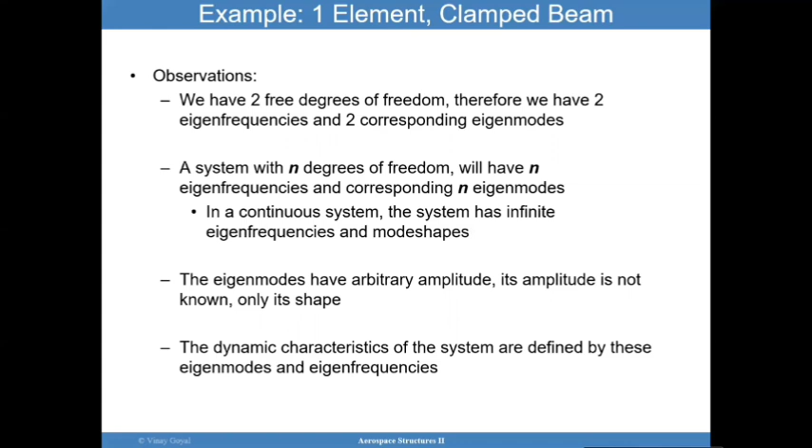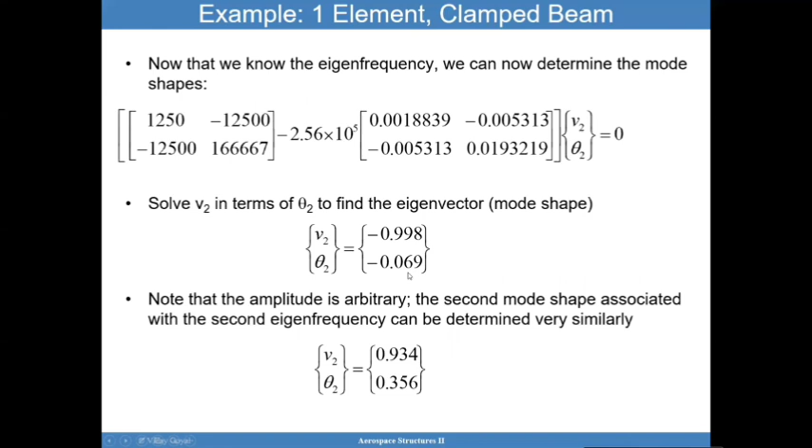Again, there's no way to calculate V2 and theta 2 in an absolute way, so I'm stuck just finding something that can be plugged in that relates V2 and theta 2. The amplitudes are basically arbitrary. If I use a 20 element discretization, I'll get a stiffness matrix and mass matrix that look a lot more extensive.

That's the point I want to make sure you understand: when you discretize a system, you have taken a continuous system and discretized it, so you have a finite number of subdomains. As a consequence of discretization, this also turns the problem into a finite number of eigenvalues and mode shapes.

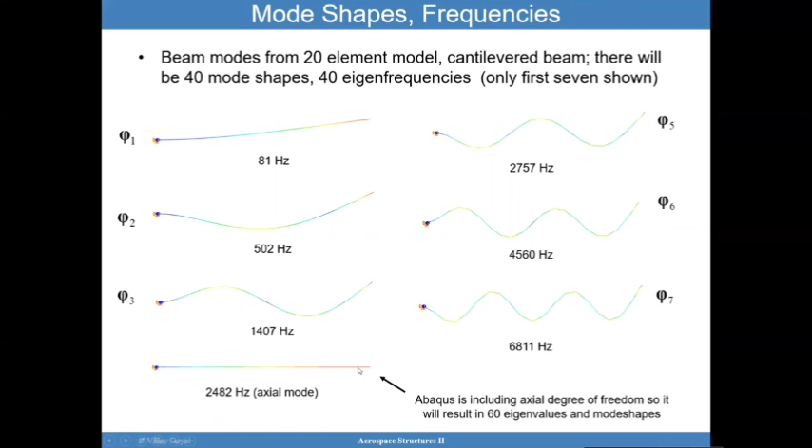It looks like this is clamped here, for the 20 element model. You can see the second mode shape, the third mode shape, and as you go higher in frequencies, the mode shapes look more and more complex. There's a very interesting mode shape, and it's the axial mode that you get as well.

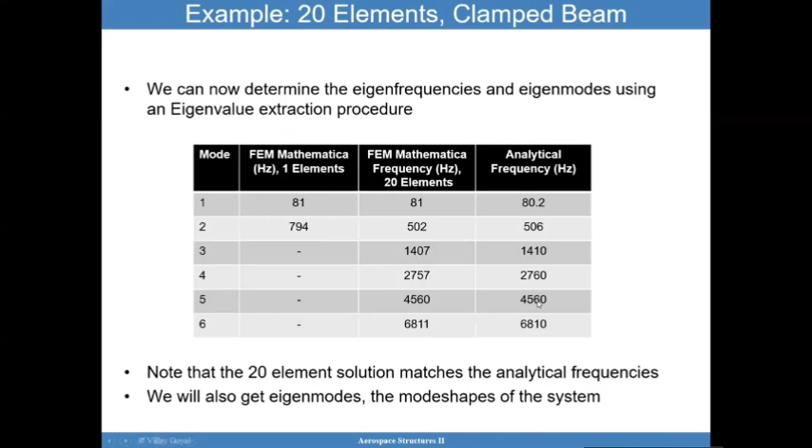So Abaqus, finite elements, and by the way, what I showed you here was not Abaqus, this was an analytical solution. This is Mathematica using our own code, 20 element and 1 element, and what I'm adding now is that the Abaqus solution is basically exactly the same as our own solution. My point being is that the solutions in Abaqus, the methods we're using are basically the same as what Abaqus is using.

And so I hope that's clear. Pardon me about that. I'm going to use that to my advantage, using the mode shapes and frequencies. A structural system is going to have fundamental natural frequencies and mode shapes that describe the way these structures will vibrate. The natural frequency basically tells you the number of cycles per second the vibration motion is occurring. So I'm going to use a transient dynamic analysis now by using the mode shapes.

If you recall, the transient dynamic analysis with direct time integration discretizes the spatial domain using finite elements, and we have to solve for deflections, velocities, and so forth as a function of time. The benefit of that is you can predict the structural behavior due to time varying excitation.

The transient load excitation is explicitly defined in the time domain. It allows for definitions of applied forces and enforced motions. You can also model nonlinear behaviors, contact plasticity, and so forth. But if you had a million degrees of freedom, it's going to be very tough to really solve that for every single time step. This approach can be computationally expensive, even for a linear system.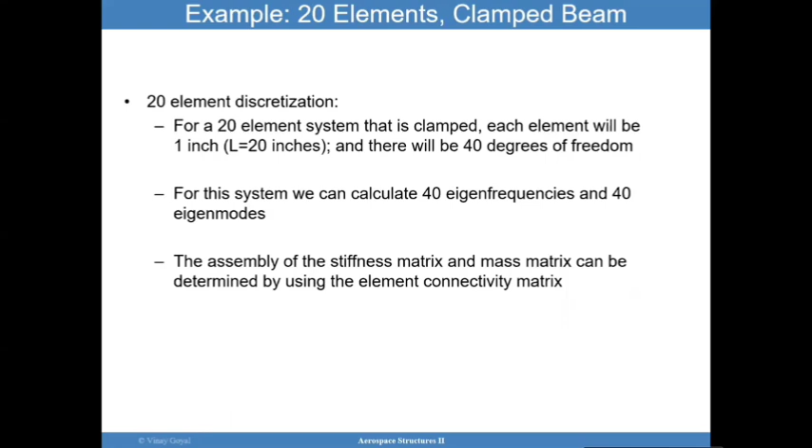So it may be more advantageous to take advantage of the fact that I know the system is going to behave as a combination of some of these modes. If I can do that, I have done a great job because I have simplified the problem to some extent. And that's where I want to move towards: the goal is to simplify the solutions in some way.

So the mode shapes are essential in a modal transient solution. In a modal transient solution, our goal is to use mode shapes to determine the response of the system, as these define the dynamic characteristics of the system. In the previous example, each mode shape we saw was of size 1 by 40, and in that particular case, there are 40 mode shapes and 40 eigenfrequencies.

But it's important to note that if I were to look at the deflections, and think of these deflections as a function of time, take the total deflection of the system as a function of time to be a combination of these mode shapes. But perhaps it's a combination of all the mode shapes, perhaps I'm using all of them.

So notice how if I say the deflection is a linear combination of all these mode shapes, that perhaps there's a little bit of this, a little bit of that. Maybe it's mostly A1, this particular first mode shape. So maybe the deflection of this beam really depends on the very first mode shape, not a lot from the second or third. Or it's really a combination of all of them, a little bit of each.

And so note that the mode shapes are known. We know the shape, I just don't know how much of each I have. So if I say that the total deflection of the beam is a linear combination of these mode shapes with amplitudes that are unknown and a function of time, then perhaps I have a way to simplify the problem.

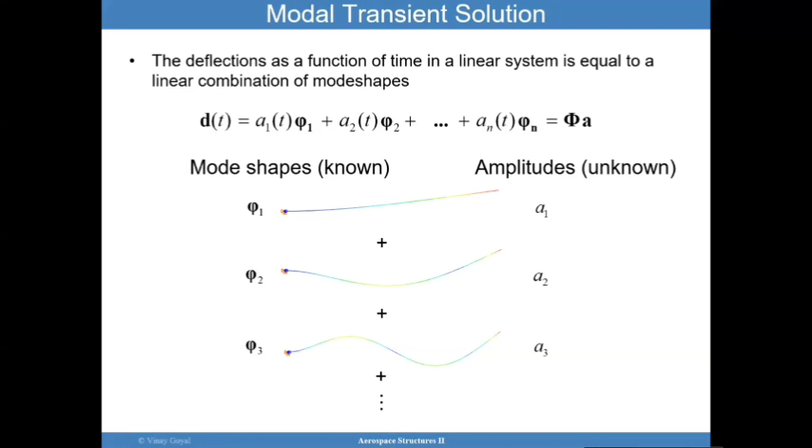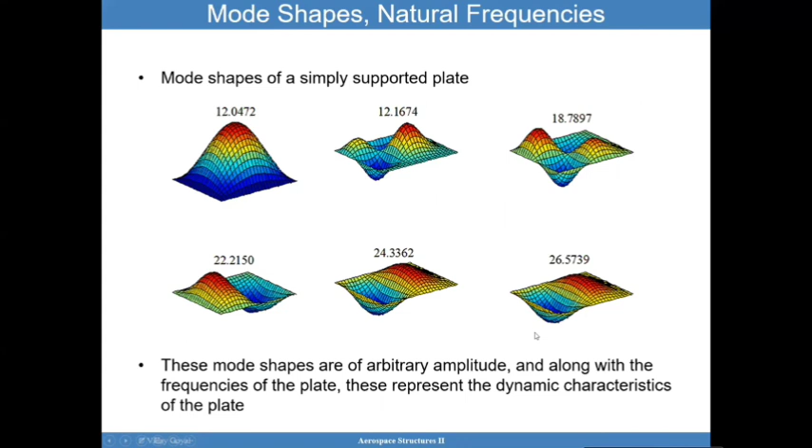But what if I told you that the rocket's deflections and response is most likely to depend on perhaps a handful of modes, maybe the first 20 or 30 modes? Maybe it's not really going to have a lot of the higher order modes. So I want to go back here to demonstrate what I mean with the plate. Say I have this plate here, and for this particular plate, perhaps there's 400 elements, so I have 400 mode shapes and 400 frequencies, and perhaps the first 6 modes is really what I need. So we're going to think about modal truncation.

The frequency content of the forcing function can perhaps be examined and used to determine what modes can be truncated. We talked about that before. If you have natural frequencies of the system, say about 30 hertz, but the forcing function frequency content is 1,000 hertz, we already showed you that omega f divided by omega n, if that value is very large, the contributions to the peak response of the system are going to be very limited. As a consequence, you can use the forcing function frequency content to guide decisions about where to cut off and what mode frequencies you should account for.

So what if I say that the total deflection of the system only depends on a handful of mode shapes, not the whole range of mode shapes and frequencies, but just a truncated set of mode shapes? Why is that? Because we already stated that if the forcing frequencies were very high compared to the natural frequencies of interest, then you can truncate the modes to only include the modes that you really need. Again, it's very important to consider and understand that.

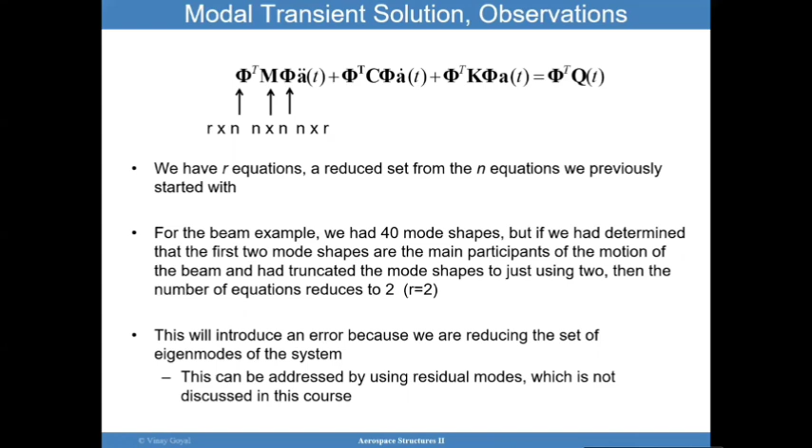Now the mathematical miracle I want to discuss is quite incredible. The mass matrix and the stiffness matrix fully couple all the degrees of freedom. However, when I perform this pre-multiplication, it results in a mathematical miracle: every single one of these equations will be fully decoupled because of the orthogonality property of the mode shapes with respect to the mass and the stiffness.

Here we will assume that the damping matrix is such that it's fully decoupled, and you can prove that - I won't do it here. The bottom line is, when you perform this particular operation, not only do I have millions of degrees of freedom reduced to 7 or 30 equations, which is way better than millions of equations, but further I have decoupled them into 7 equations. I turn a whole rocket into mass and spring stiffnesses that are fully decoupled.

And I can now solve for these amplitudes. If I know these amplitudes and I know the mode shapes, then I know how D, which is the deflection of the whole rocket, varies over time. That's what I call a mathematical miracle. One of the most exciting things in dynamics is exactly what I just covered.

The other thing I want to point out here is that for a damped system, you can add this term right here. For the ith frequency, you can directly specify the damping ratio. If it's not available, you can assume 1%, it's a good approximation. Omega can be quickly calculated, so that's that.

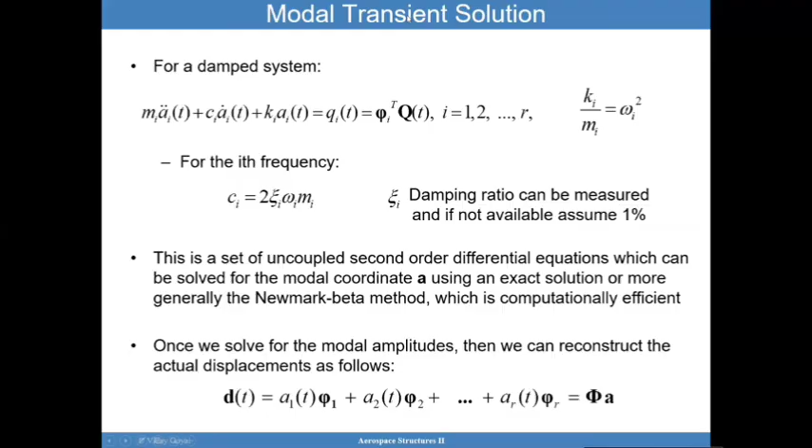There are other ways to specify damping. One such approach is called Rayleigh damping or proportional damping. I recommend that you read this paper in the AIAA journal from 2016 that discusses some issues with that approach. I think one of the best approaches is to measure damping and specifically provide that in the damping matrix. That can be more successful.

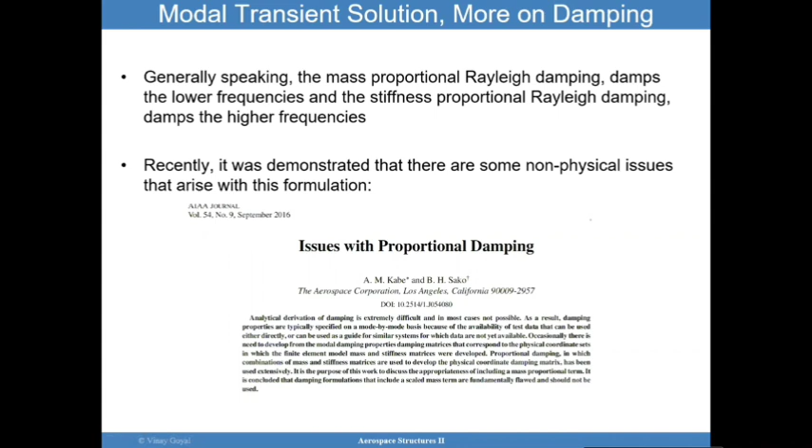So the analysis process flow is the following. You have a partial differential equation, you discretize the equation into a discrete number of elements, and you get a discrete number of degrees of freedom. What you want to do is calculate the mode shapes and frequencies for that system. You're going to have a discrete number of them, not infinite, only because we discretize the continuous system. You get the free vibration problem, and try to understand the dynamic characteristics of the system, because that's going to be very important moving forward.

The total deflection of the system is assumed to be a linear combination of these modes. We want to use a smart truncated set of modes, and make sure that we use that in the transient simulations. How do you determine the truncated set of modes?

Say you have a forcing frequency of 50 hertz. You want to make sure that any natural frequencies beyond that are included in your assessment. But if you have a forcing frequency that didn't really matter for the problem, then let me backtrack again. I keep saying it incorrectly. I want to make sure it's clear: you have a forcing frequency and you know the frequency content of that. You want to truncate past that forcing frequency, so you can account for that loading condition.

So I showed you how you can develop an uncoupled system of equations in the modal coordinate and how you can impose initial boundary conditions. Then you can use the Newmark beta method to really solve the problem. Once a solution is obtained, you can recover the deflections of the whole system.

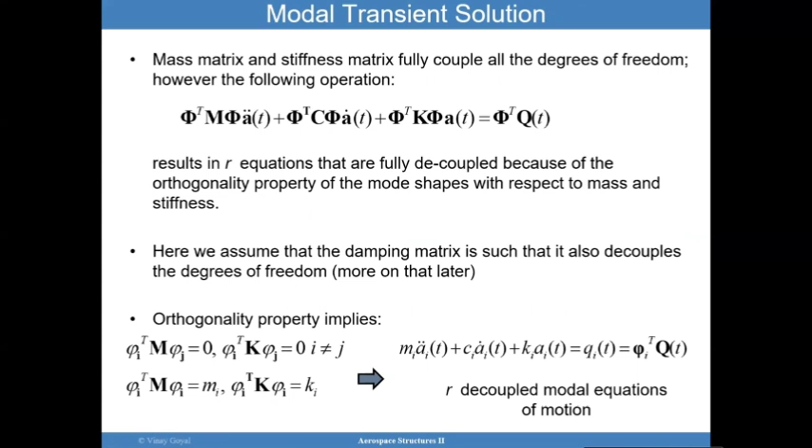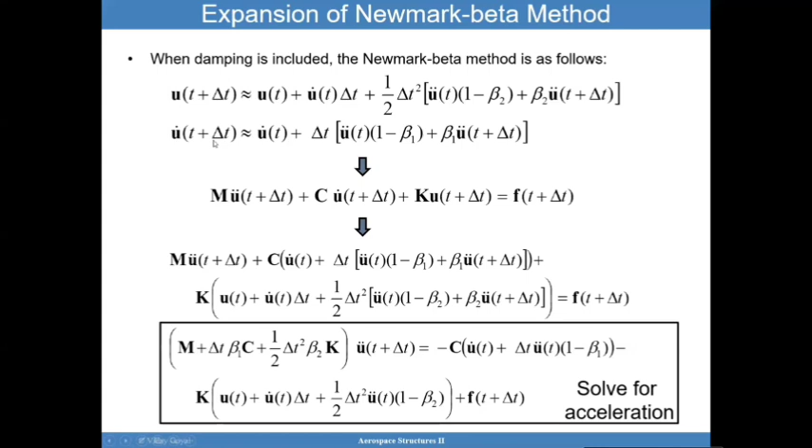Very powerful approach. And then we've used the Newmark beta method to really solve the problem. We discussed the Newmark beta method in great detail earlier: Taylor series expansion on U, Taylor series expansion on U dot, go ahead and review that back again to get a better understanding.

So you can do this in Abaqus very simply. Here's how you do it. You have a star modal dynamic procedure, and then you have to select the truncated set of modes. Here we selected 10 modes out of 40 for the beam problem, and I specify 1% damping for those first 10 modes. That's a very simple process.

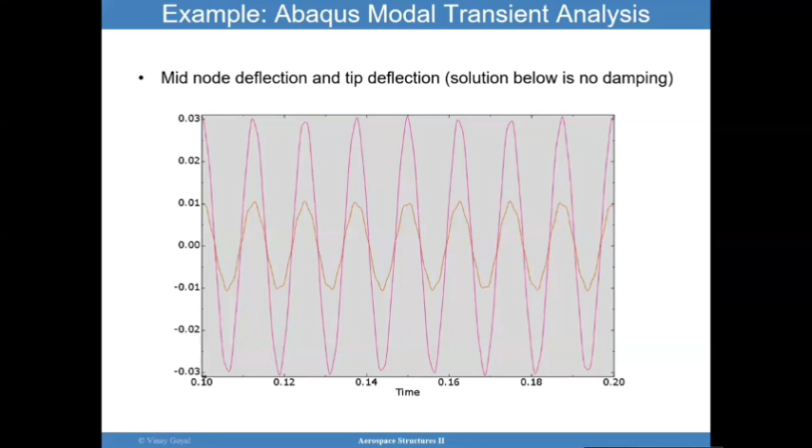Again, this is the same cantilever beam problem we solved before, but using the modal transient solution. If you compare the solution I got using this, you'll see you get the same answer as we did previously with the direct time integration considering all degrees of freedom, because there's no other way to do it.

So the transient analysis summary is as follows. We discussed direct time integration, and I showed you that can be quite expensive computationally. So we shifted over to a modal dynamic transient analysis solution approach.

We want to make sure the time step you select, and this is a lesson learned here, is chosen sufficiently small to capture the highest frequency of interest in the response. So if the highest frequency you're interested in is 100 hertz, each time period is 0.01 seconds. You want at least 5 steps within that time period, which means you should have a delta t of 0.002 seconds.

So we're going to dive into steady state dynamics using finite elements. We already discussed steady state dynamics earlier, but I want to cover how this would be done in finite elements. If you recall, modeling the transient response is quite intuitive, you can see the time history of the event, but there's an advantage to understanding the system's behavior when you subject it to a forcing frequency, looking at it from the frequency domain.

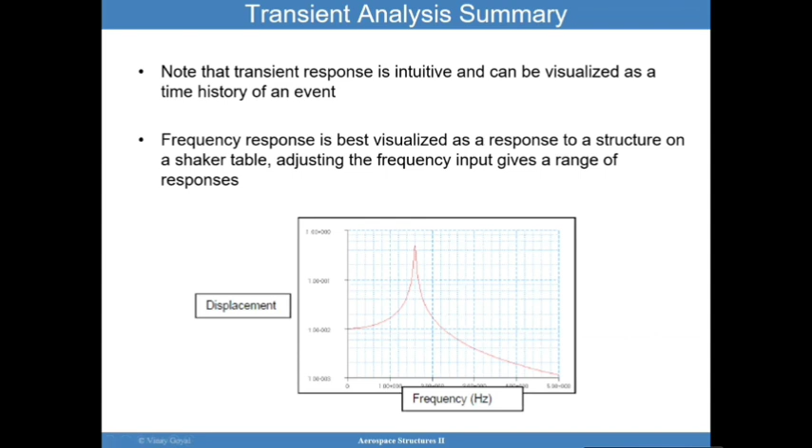As you recall, the forced vibration response equation was given by this. If the right-hand side is 0, we call that a free vibration problem. In this case, we have a forcing input here with a frequency omega, and the frequency of the system is omega n, the natural frequency. So the forcing frequency is omega with amplitude p, a harmonic input.

And we discussed earlier how you can input a Fourier series input. As long as it's periodic, we can call that harmonic. This will cause an initial response that quickly dies out, but what remains is your steady state response. That's the part we'll be discussing today, how to include and model that in finite elements, and how to determine the peak amplitude when I subject the system to this forcing function.

Recall earlier that the deflection u is a function of omega. For example, if I make omega close to omega n with no damping, this denominator goes to 0, giving an infinite peak response. So all systems have damping, so that's not realistic. If I have some amount of damping, then this doesn't go to 0, and your peak response is dominated by damping, or the quality factor, as we called it earlier, dominated by damping, as you can see here.

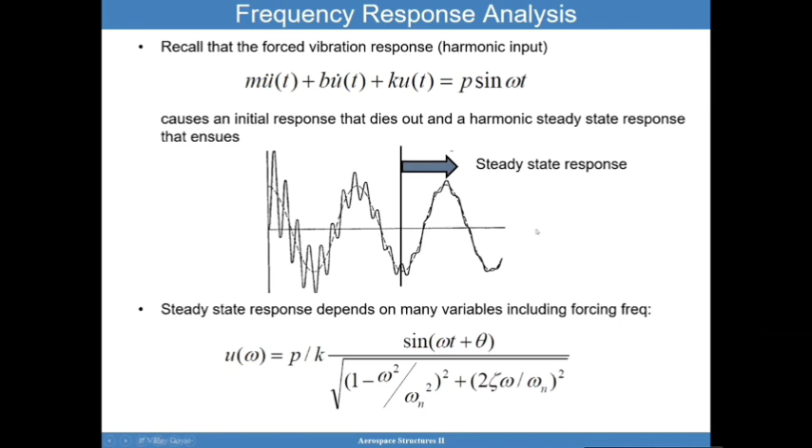So why we perform a steady state frequency response analysis is helpful for evaluating fatigue. As an example, I could put a forcing frequency or harmonic input, which results in a steady state response that's also harmonic. My point is you have to evaluate the fatigue damage due to these oscillating stresses, and that's one reason why this is helpful.

The second reason this is helpful is if you want to analyze to make sure the structure does not get into clearance problems, that's where this could be helpful. You can also use this analysis to design the system so you know what the peak response is, and then you can design around it.

For example, I could design it to be away from this peak response, and I can select my forcing frequency to be different from the natural frequency, or I can redesign my structure to modify the natural frequency. Or the other option is to work with the damping. You have a lot of different options here, but the idea is to not allow these two to be too close to each other.

But there are some cases where that's not possible, it's not possible to keep them apart. From that vantage point, these plots become very useful because you can see what the peak response is.

You can even apply this statically to a model to understand what is going on in terms of stresses. So implementing this in the finite element solver goes back to the basics: you have a partial differential equation where the variables, deflections, are a function spatially, and also a function of time, the time domain. We discussed how that's so hard to solve, so we have to use finite element models because they discretize these partial differential equations and put them in a manner that can apply the numerical ideas we discussed earlier.

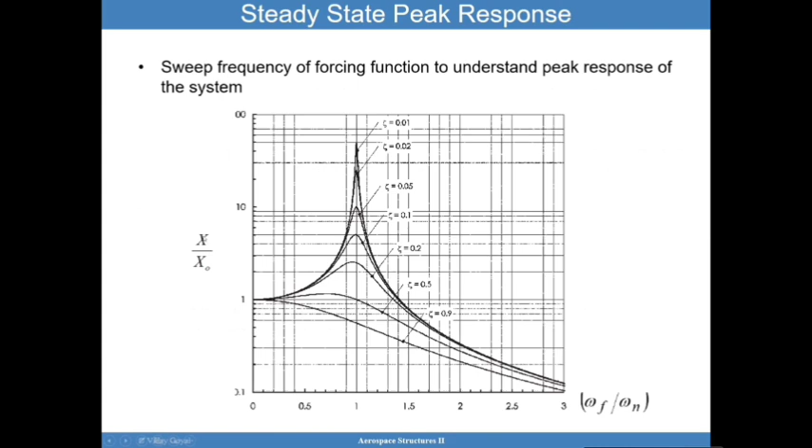Again, this y-axis here is telling me a lot about the dynamic amplification compared to if I had put the input as a static loading. So this is really giving me that idea of what's going on dynamically.